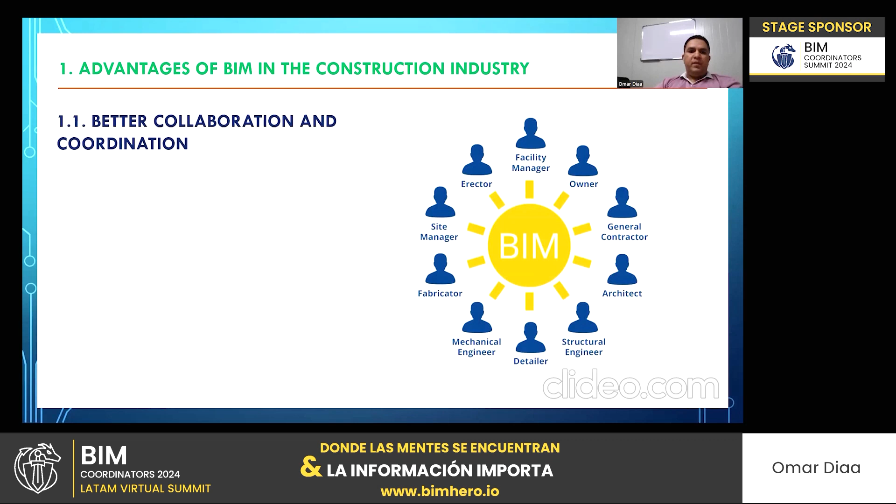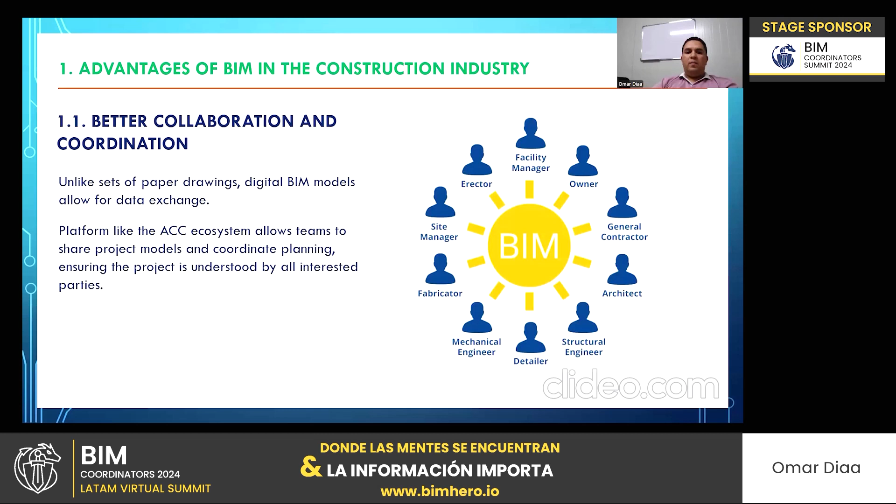Advantages of BIM in the construction industry. The first one is better collaboration and coordination. Unlike sets of paper drawings, digital BIM models allow for data exchange. A website like BIM 360 from Autodesk allows teams to share project models and coordinate planning, ensuring the project is understood by all interested stakeholders or parties.

Also, access to the cloud site enables project teams to bring the office to the construction site. In the same example of the BIM 360 platform or site from Autodesk, it allows teams to view drawings and models even on their mobile devices.

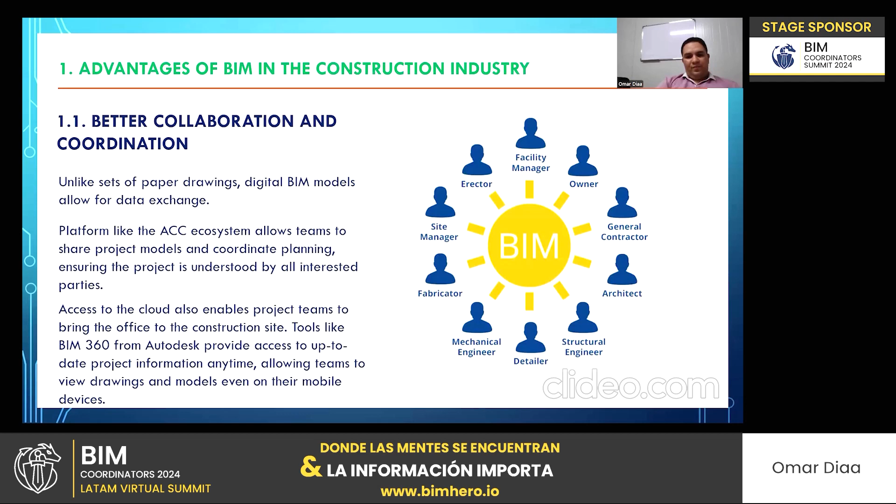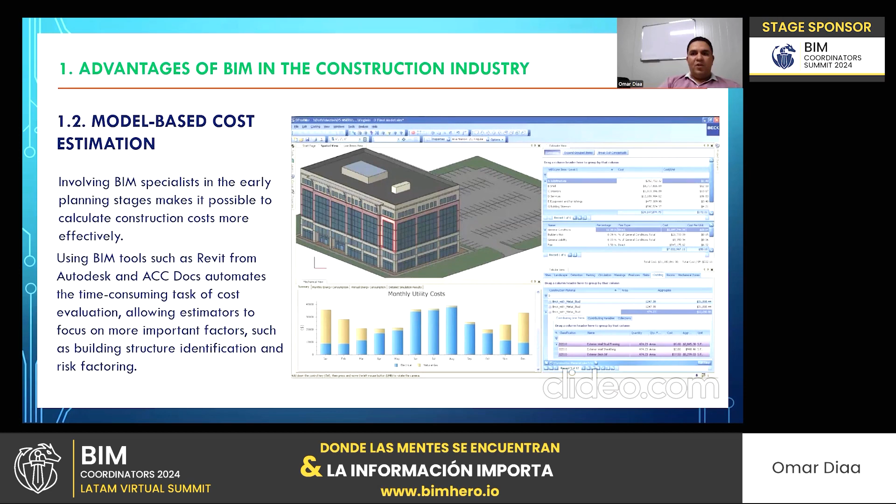Advantage number two, model-based cost estimation. Involving BIM specialists in the early planning stages makes it possible to calculate construction costs more effectively using BIM tools such as Revit from Autodesk, and BIM 360 or ACC Docs from Autodesk automate the time-consuming task of cost evaluation, allowing estimators to focus on more important factors such as building structure identification and risk factoring. So advantage number two is cost estimation, which is based on the Revit model.

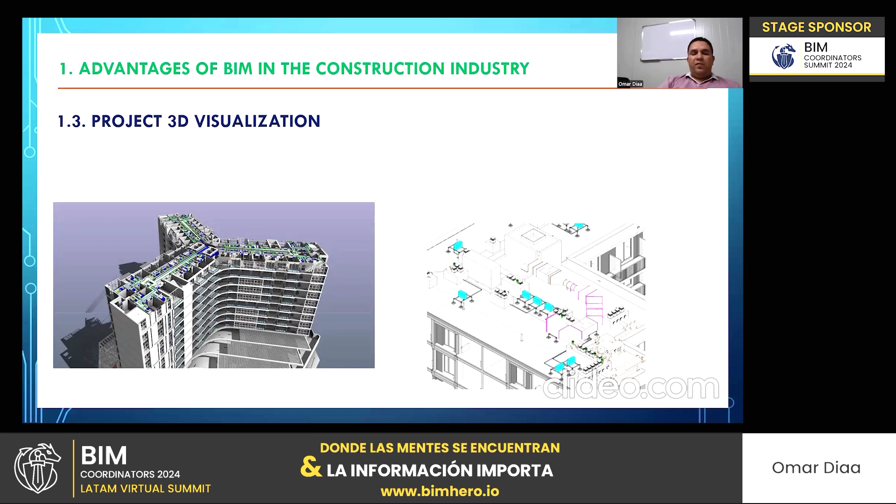Number three, project 3D visualization. This is the main benefit of using 3D modeling in general. Sometimes construction clients draw sketches of their projects as they envision them, but it can be difficult for professionals to understand their ideas. By using BIM, you can create 3D models of buildings, roads, bridges and infrastructure works. It helps visualize the building's appearance, making the project presentation clear to everyone.

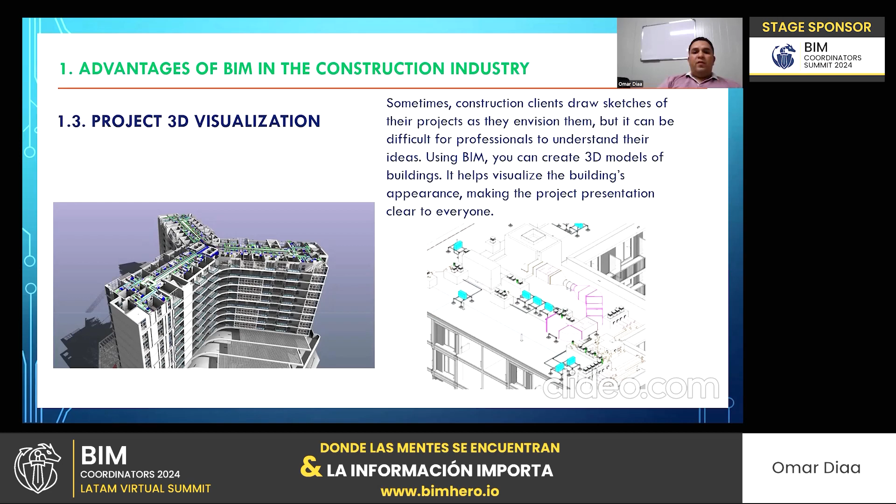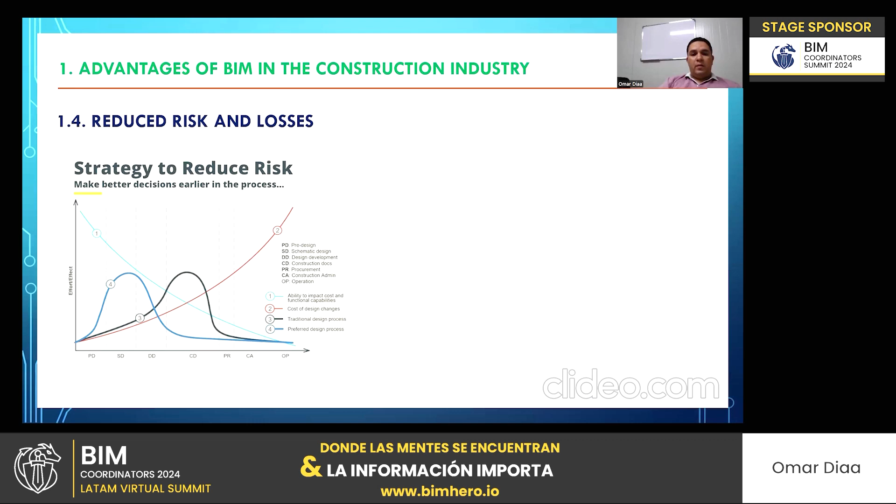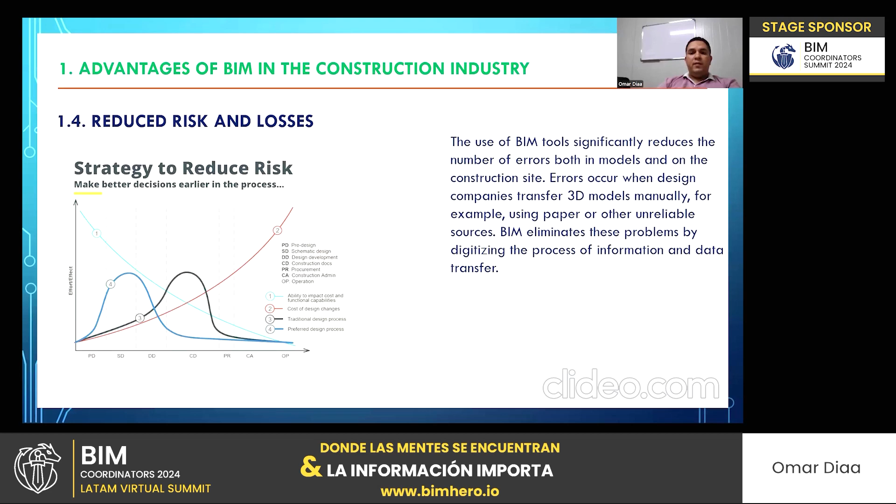Advantage number four, reduce risk and losses. If you look at this graph, you will see how, when working on BIM, you reduce risk and losses. The use of BIM tools significantly reduces the number of errors, both in models and on the construction site. Errors occur when design companies transfer 3D models manually, for example using paper or other unreliable sources. BIM eliminates these problems by digitizing the process of information and data transfer.

Advantage number five of using BIM in the construction industry is improved scheduling. BIM saves money by reducing project cycle times and eliminating schedule delays. BIM allows designing and creating documentation simultaneously. Documentation can be easily adapted to changed site conditions, making it possible to develop more precise timetables.

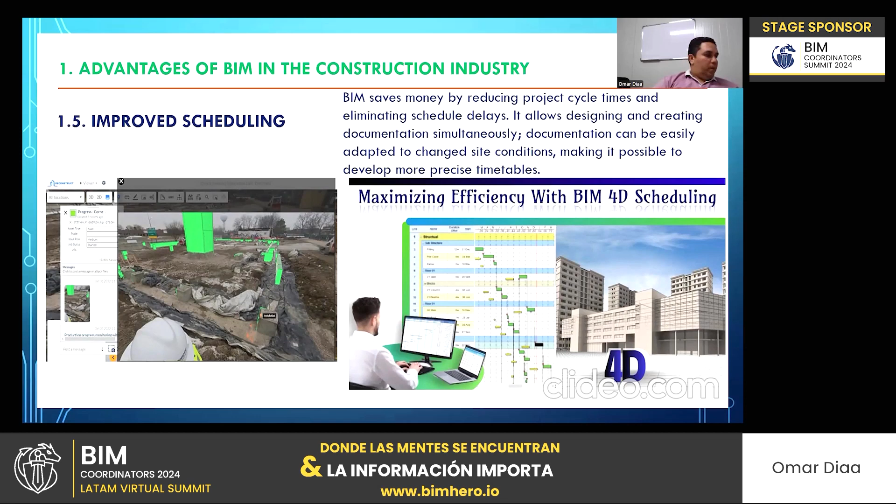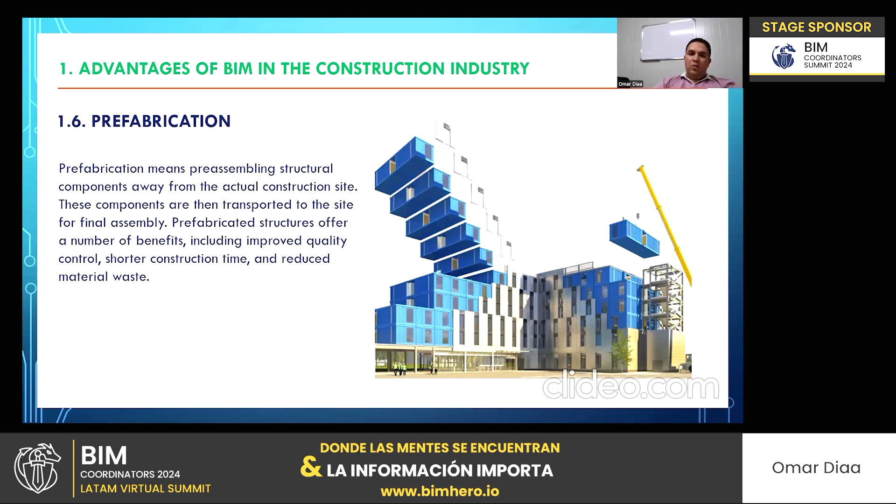That in BIM, that in 3D models. These components are then transported to the site for final assembly. Prefabricated structures offer a number of benefits, including improved quality control, shorter construction time, and reduced material waste, compared with traditional methods.

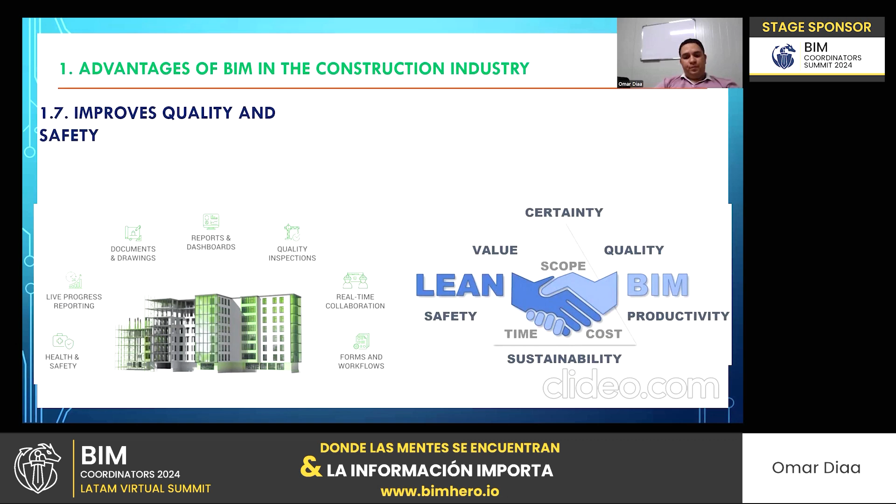Advantage number 7, improve the quality and the safety. BIM models provide more accurate construction planning and management, producing higher final product quality. The data are used for quality control to ensure all building components and systems comply with required standards. The models also help identify potential hazards and reduce risk of occupational accidents.

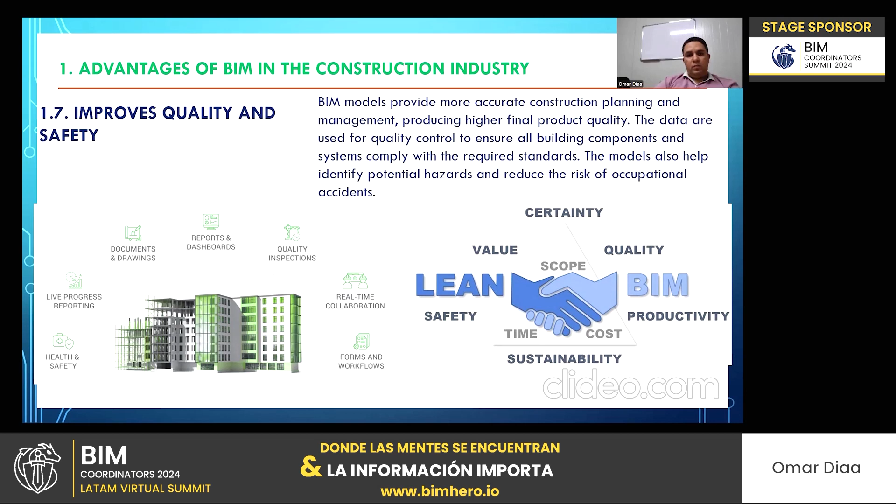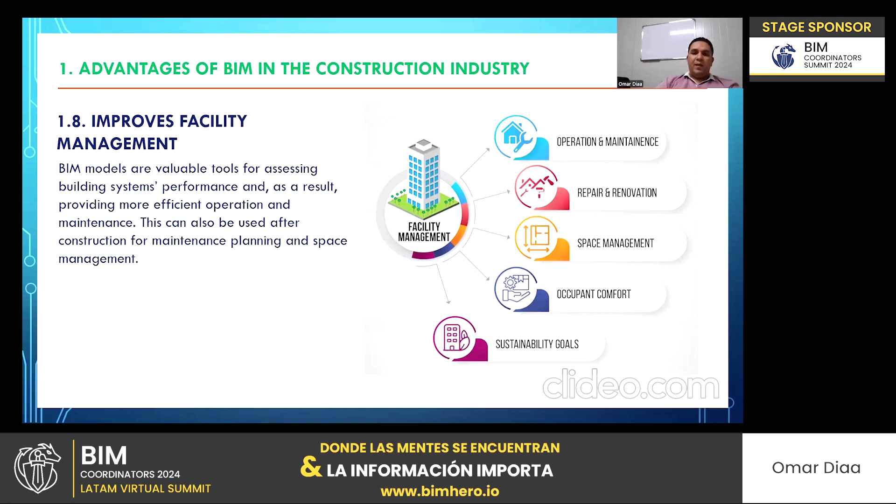Advantage number 8, BIM improves facility management. BIM models are valuable tools for assessing building systems performance, providing more efficient operation and maintenance. This can also be used after construction for maintenance planning and space management. So BIM extends to facility management also.

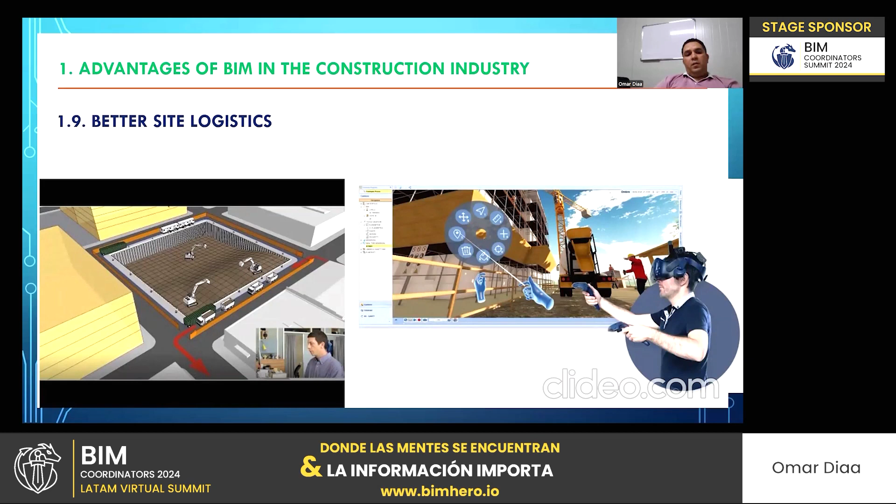Number 9 of the advantages of BIM in construction, better site logistics. The site logistics tools available in BIM are one of the best means for construction planning. In simple terms, all information related to the construction process can be collected and used to plan and implement the project best and most efficiently.

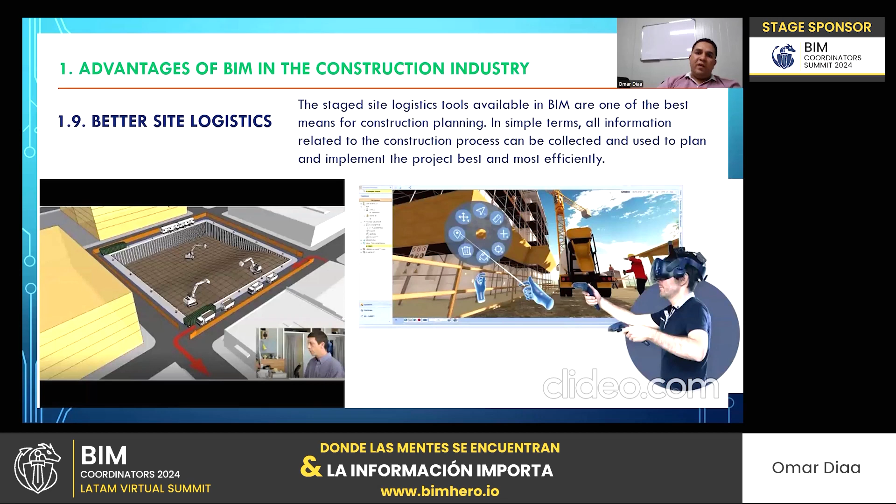These were 9 advantages of BIM, and these 9 advantages of BIM aren't all of the advantages of BIM. We can count many advantages of BIM. Sure, these 9 are from tens of advantages of using BIM in construction.

BIM related factors affecting the project in construction. In this item, I have brought a study from some engineers in two universities, and I like this study, so I have mentioned it here.

This study was done by some engineers from the National University of Civil Engineering in Vietnam, and another engineer from the Engineering and Architectural Studies, ARA Institute of Canterbury in New Zealand. This study was under the title of Impact of BIM Related Factors Affecting Construction Project Performance.

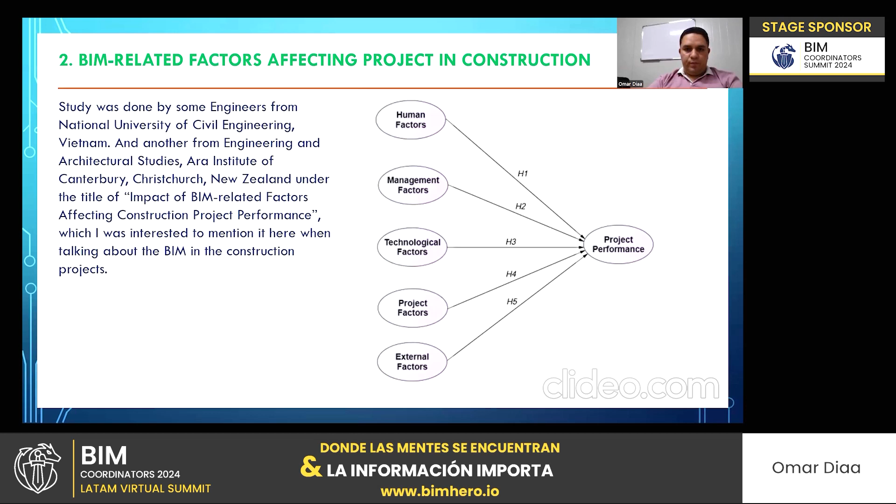Human factors can be itemized in 3 points. Lack of BIM users on the project, limited or no previous experience working with other companies on BIM projects. Lack of interoperability between BIM software used by team members. Third, lack of trained professionals to handle BIM tools. This was the human factors.

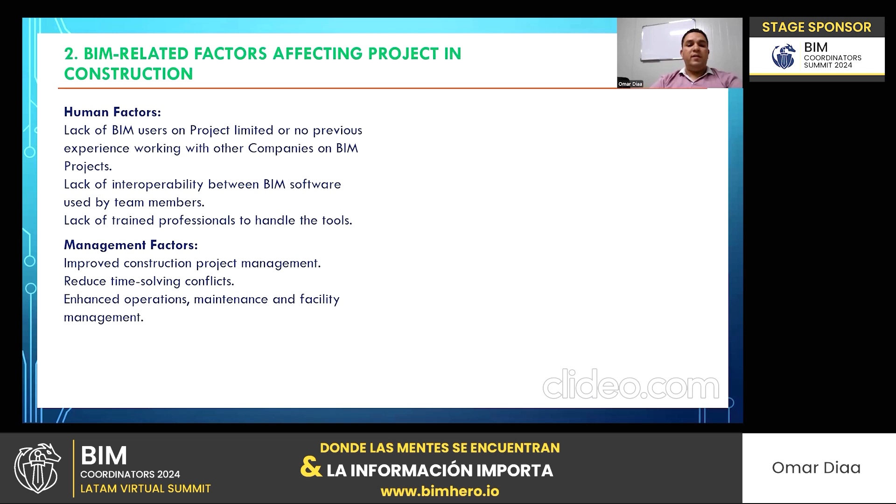Management factors: improved construction project management to reduce time solving conflicts. Number three, enhanced operations, maintenance, and facility management, which can be considered as advantages of BIM, and can be included under the management factors.

The technological factors: feasibility of using BIM, trialability, accessibility, functionality, and availability of IT team support. Factor number four is the project factors: provided with 3D modeling design in the design stage, provided with 4D modeling schedule of construction activities, 5D modeling which is the material takeoff and cost estimate, improved coordination of building systems, and better predictability of project outcomes.

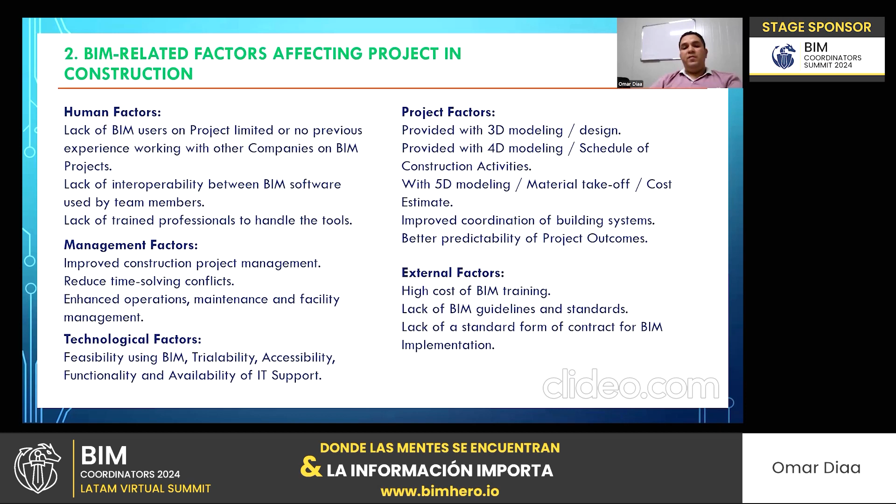Factor number 5, the external factors affecting the project in construction may include high cost of BIM training, lack of BIM guidelines and standards, and lack of standard form of contract for BIM implementation.

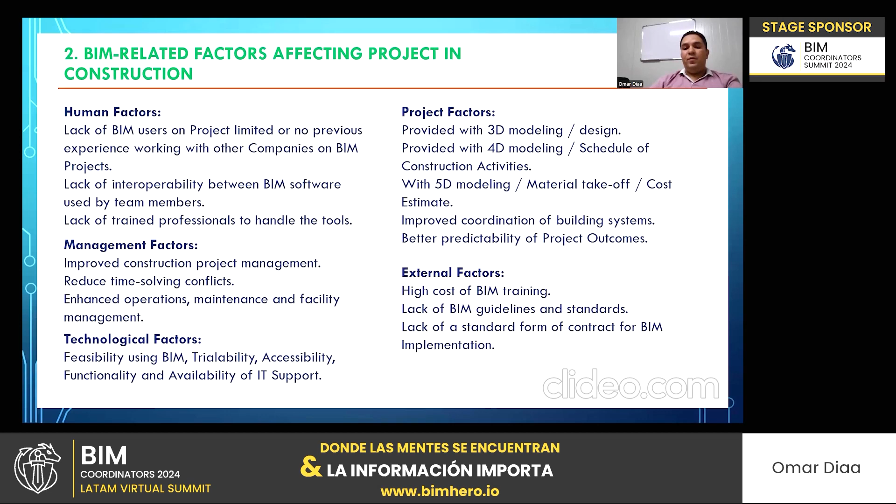In 2011, a National BIM survey was done, and found that 43% of people were unaware of BIM. That was in 2011. 45% of people were just aware, they just knew there is something called BIM. And only 13% at this time were aware and were using BIM.

If we compare this with 2020, we will find that 73% of people are using or were using and aware of BIM. Then only 26% of people just aware of BIM, and 1% unaware of BIM. I think if we make this survey in 2024, we will find 0% unaware of BIM.